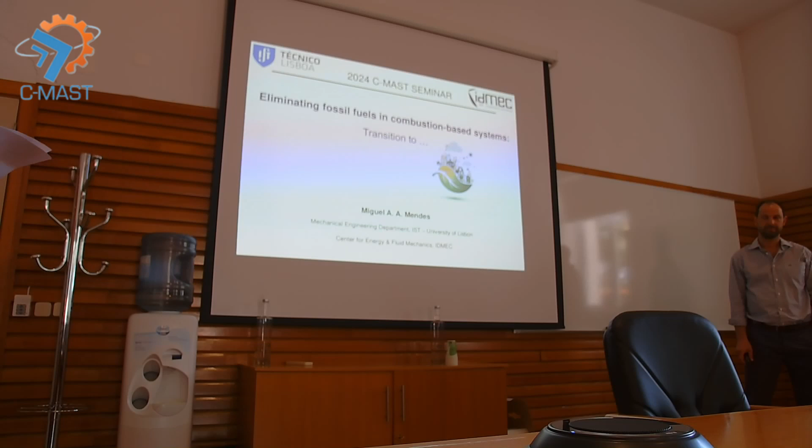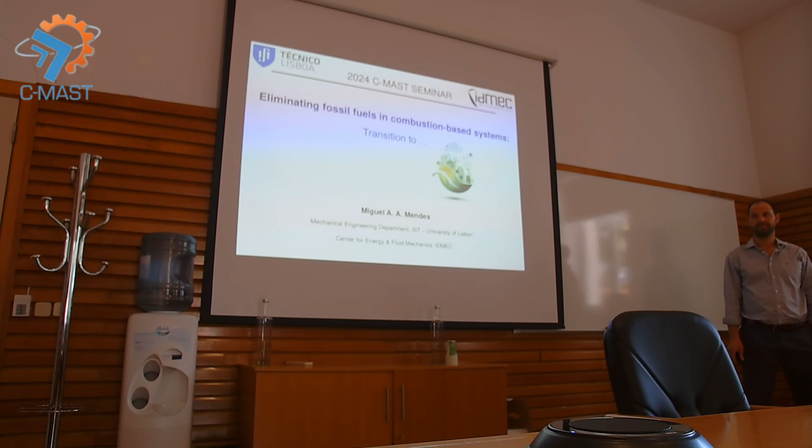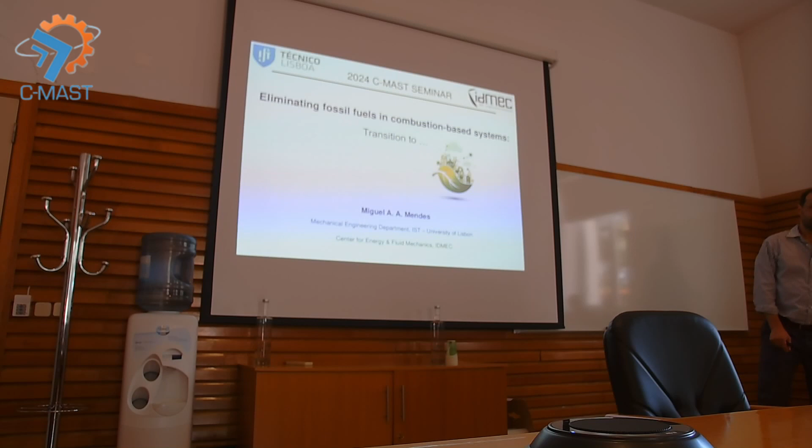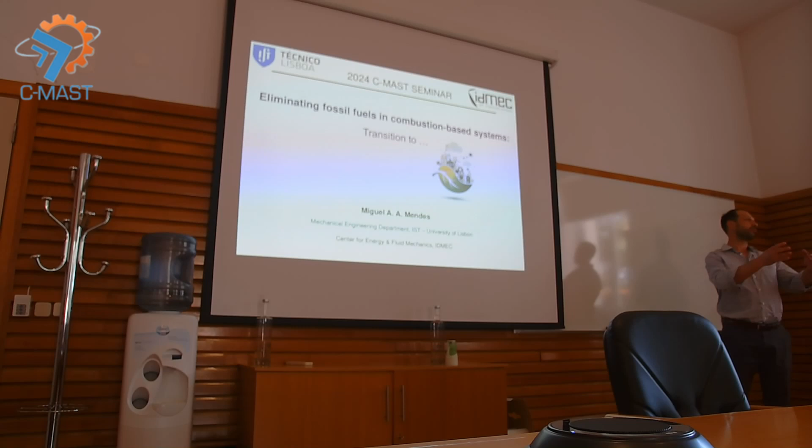Many thanks, and thank you very much for the introduction. Thank you very much for the invitation, and it is a pleasure for me to be here, and I'm jealous that you have the university in such a nice place, with such a nice atmosphere, and I hope that I can bring some useful information to you.

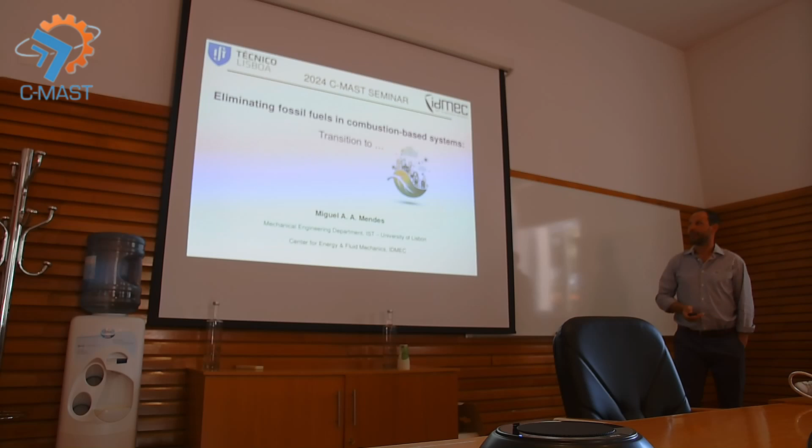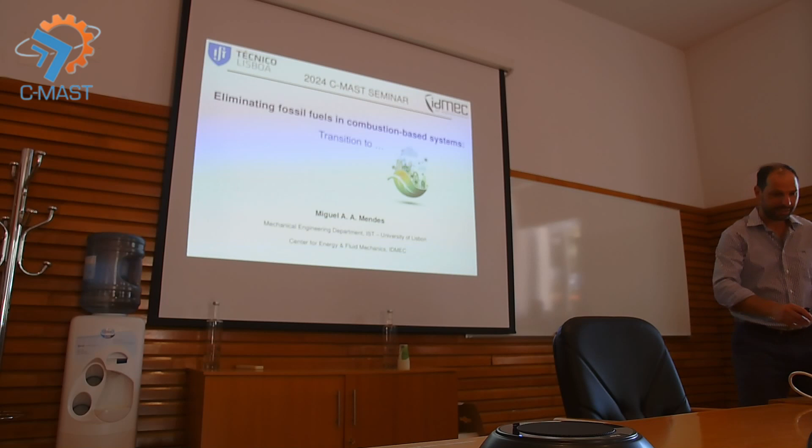So, eliminating fossil fuels in combustion-based systems, the question is: the transition to what? This is the main objective of this presentation, to present the actual situation.

Before that, let me make a short introduction. As was said, I took on the big responsibility of coordinating the Combustion Laboratory of IDMEC IST, which was led by Professor Mário Costa. He created this laboratory and was a person known worldwide in the field of combustion, particularly industrial combustion, not just fundamental studies but applications. At the moment we don't have such a big team.

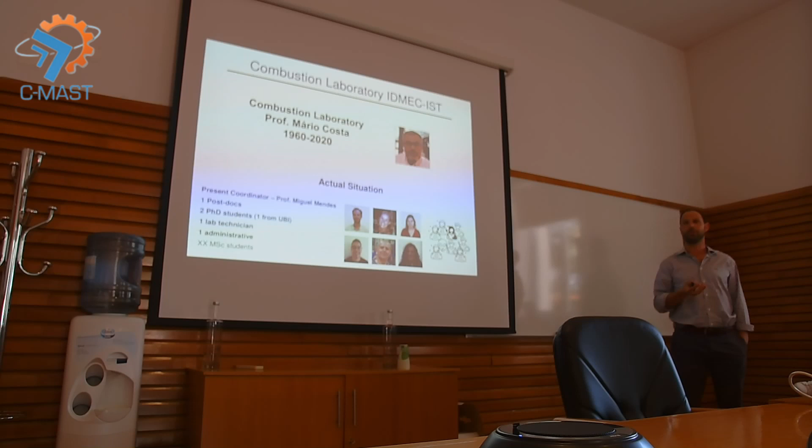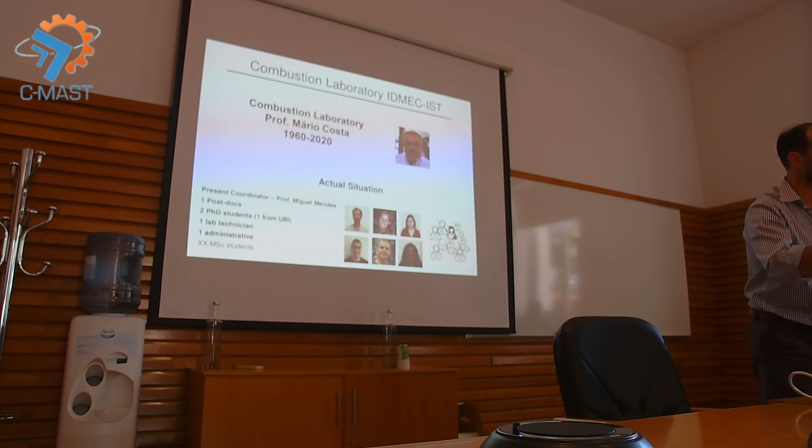I want to highlight that we have one PhD student from UBI who is staying there, although doing the PhD here. We have collaboration with Professor André Silva. This is just to give you the perspective that we have an open laboratory, so if you need to do something or need something, just send us an email, as long as we are able to give support.

So, our research areas: more or less we are focused on biomass thermochemical conversion processes, like carbonization and other processes without oxygen - here we don't really have combustion, it's pyrolysis. Then some research in alternative fuels to conventional fossil fuels, so hydrogen, ammonia, sometimes multi-fuel systems, and particular applications.

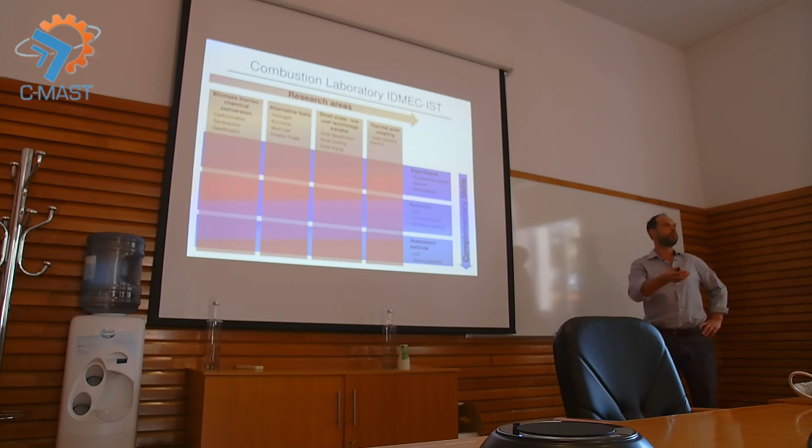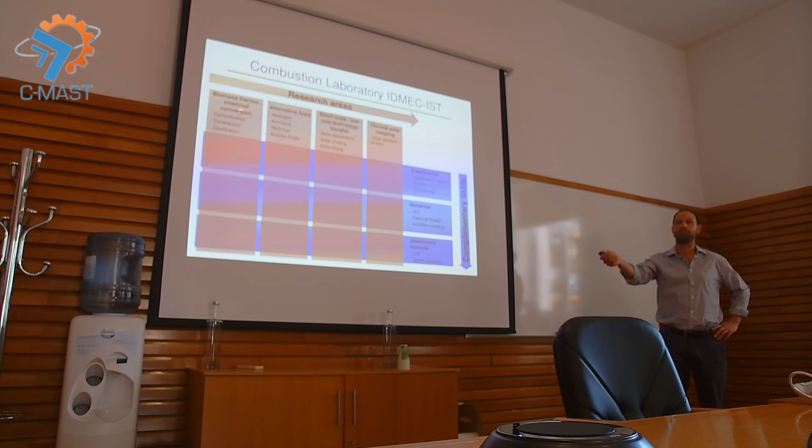This is where we have cooperation with UBI and TAP, on sustainable aviation fuels. And then other side activities, basically trying to relate chemical energy storage in the form of fuel with solar thermal energy - small scale, low cost technology transfer. This is useful, for example, for developing countries. Industry is not very interested in this type of project, but thermal-solar coupling, particularly when you have an endothermic process, may be interesting - solar concentration, high temperature.

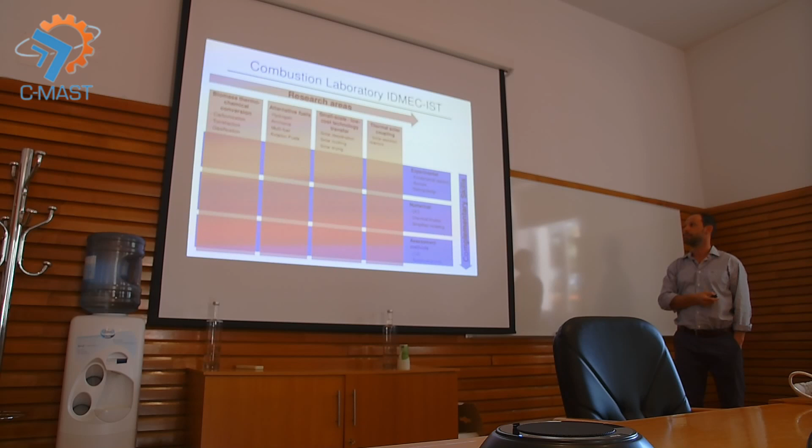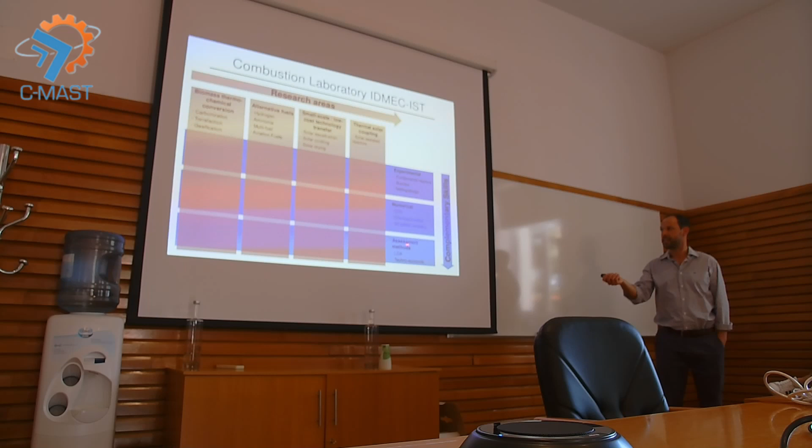And then the skills that we have in our team: from experimental design, testing of reactors, and also some numerics, and also some assessment methods like techno-economic analysis or life cycle analysis.

Okay, let's go directly to the topic: available energy for combustion. The first thing we need to understand with all this transition that we are facing nowadays is that all energy sources are of renewable origin, even fossil fuels. The main problem here is the formation time scale.

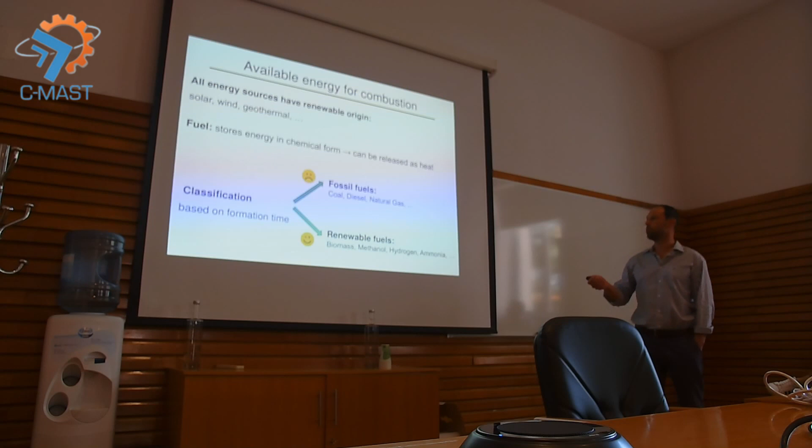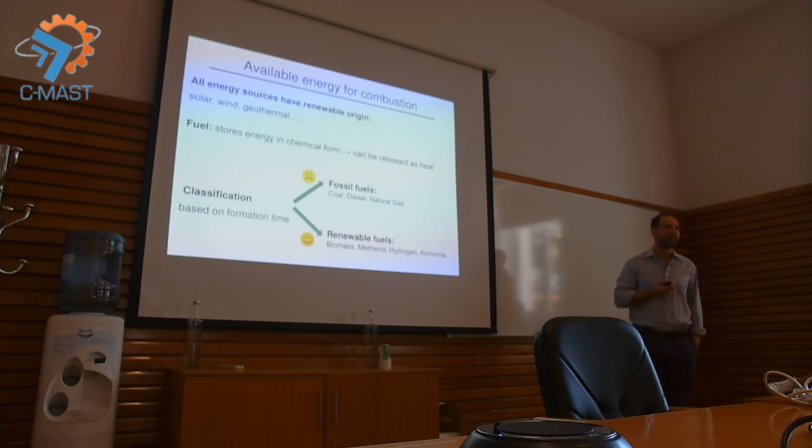What we call a fossil fuel is one where the formation time scale is much larger than the human scale, let's say the scale of utilization. Renewables are now the focus, basically because there are some issues at the moment in terms of sustainability. But keep in mind that in the end, all energy sources are renewable.

At the moment, the main problem, according to the data we are facing, is the CO2 problem. But we are still relying on fossil fuels in a very strong manner. We cannot just turn off the lights and stop the car, so we need to find alternatives.

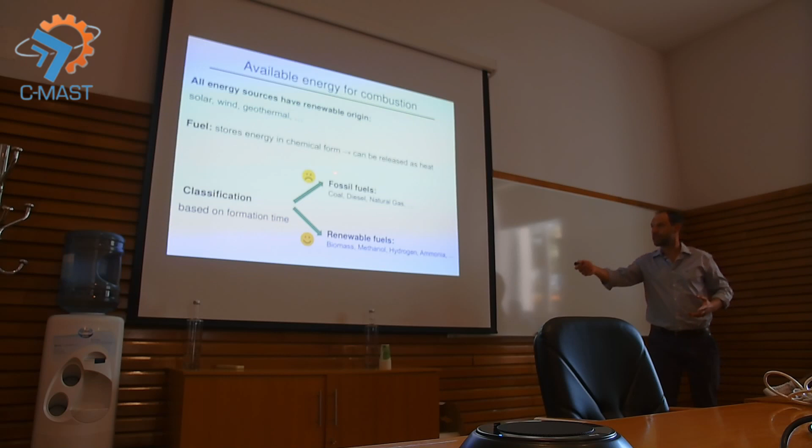The main problem - and this is why I placed here this sad and happy face - it's like you go into a bakery and discover you just find their bread, okay? So these are the cakes, this is the bread, we could say, if you look in terms of energy density. Fossil fuels are very attractive because the energy density is very high.

When you look at hydrogen in terms of volumetric energy density, or at batteries, fossil fuels are winning. So the alternatives that are nowadays being proposed, besides hydrogen, include methanol and ammonia. We are going to explore these issues a bit.

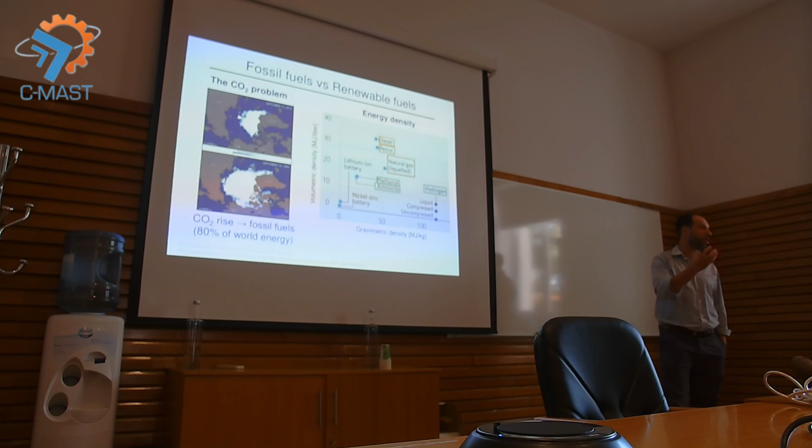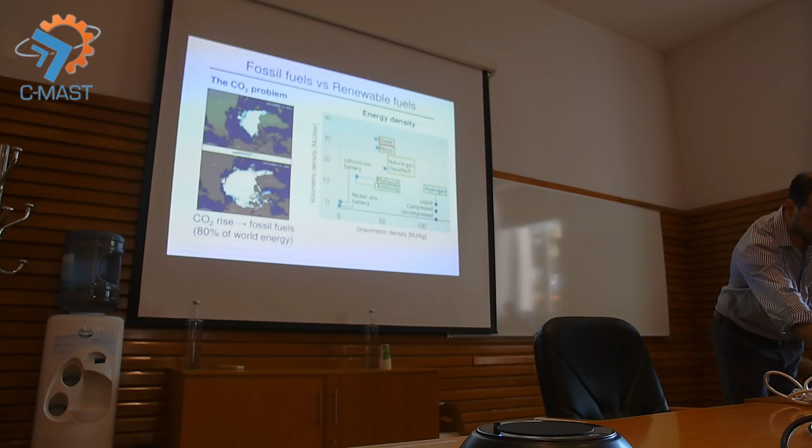But before that, don't forget that we are in transition - 80% of the energy in the world is still based on fossil fuels. So let's look into the CO2 problem.

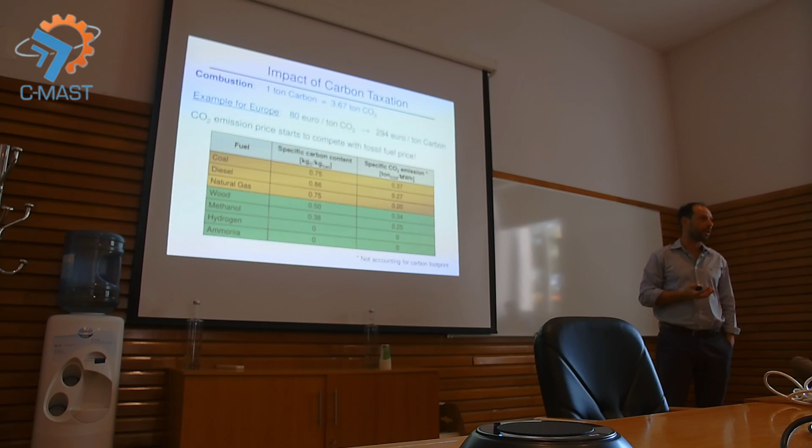When you burn 1 ton of carbon, you emit almost 4 tons of CO2. In Europe nowadays, companies pay 80 euros per ton of CO2, which means almost 300 euros per ton of carbon. So if you have a system running with coal, you pay more for the carbon tax than for the fuel. We need to look into how much carbon you are emitting, and companies are facing a very difficult situation at the moment.

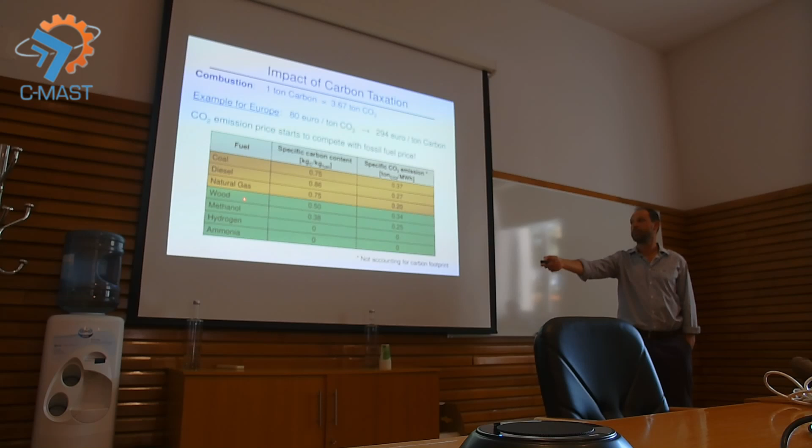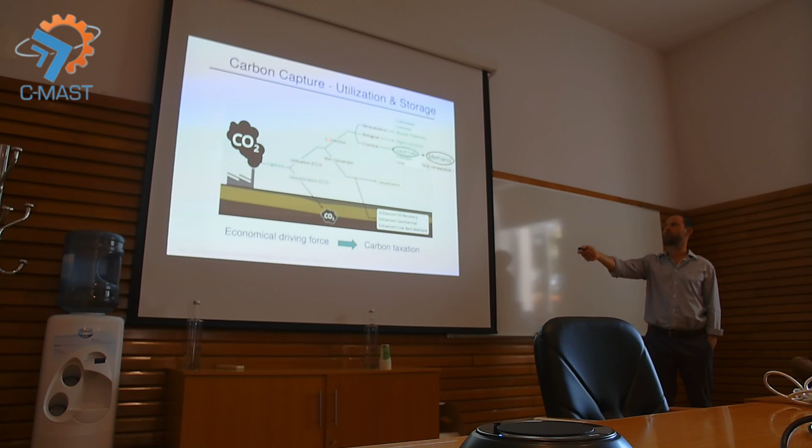Although wood or biomass emits a lot of carbon, it is from sustainable origin. Methanol, hydrogen, and ammonia don't emit carbon, or methanol emits but if it's from sustainable origin there's not a big problem. Be careful with strategies that are very fashionable nowadays, like carbon capture and utilization, where they capture CO2 and use it to produce liquid fuels like methanol. If this methanol is not from renewable origin, it's also not the solution.

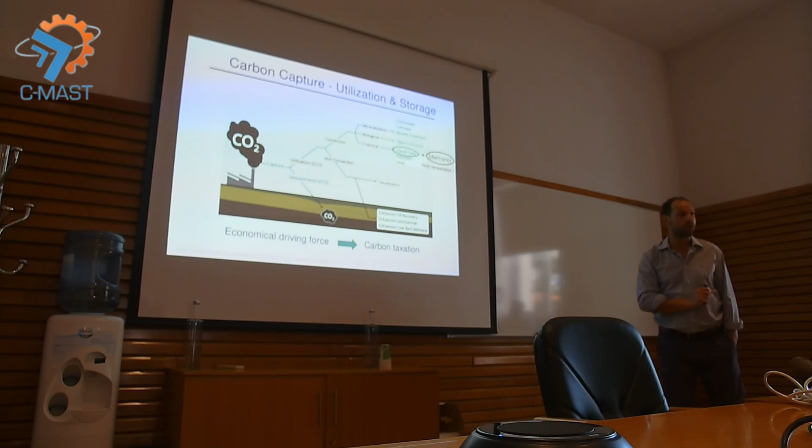So in the end, carbon taxation is the economical driving force for all of this. From the point of view of technology, if we were used to having burners that burn fuel with air, you reach almost 2000 Celsius, without heat losses.

If you have a system for carbon capture, you need to change the strategy. Why? When you burn air with the fuel, you have CO2, water, and nitrogen from the air in the exhaust. The water is very easy to separate from the CO2 - you just decrease the temperature and get condensation of the water. But it's difficult to separate the CO2 from nitrogen.

So what you do is separate the nitrogen before the combustion process, because the air is at ambient temperature, it's much easier. Then you burn the fuel with pure oxygen. What happens? You get very large temperatures. So you either change the material of your system to a high temperature material, or you can recirculate part of the products back to the burner, which will dilute the combustion and decrease the temperature.

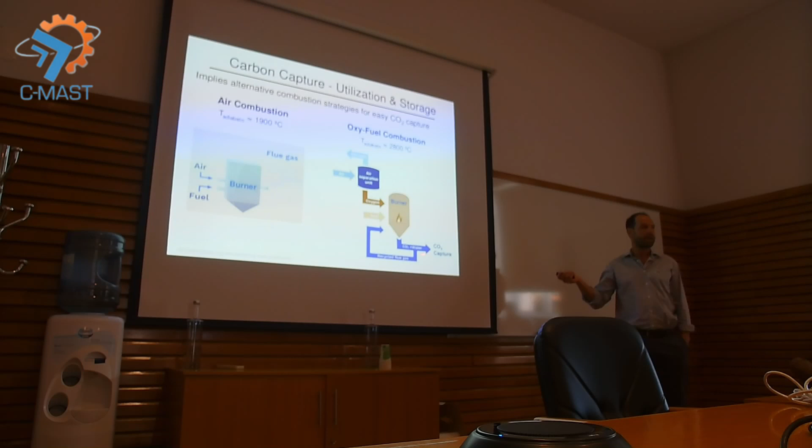But now it's very easy to separate the CO2 because you don't have nitrogen - you just have water and CO2. You decrease the temperature, condensate the water, and get the CO2 for whatever utilization you want. So this is the transition, where the capture of CO2 also plays a role.

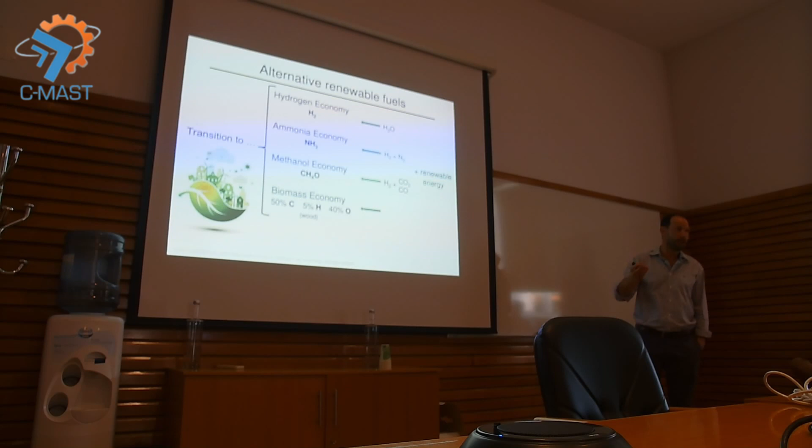But let's look more forward, to alternative renewable fuels. Here is where we start to get confused. Transition to what? You have the hydrogen economy - I think all of you have heard about it. You just need water and renewable electricity to produce the hydrogen. Then there's also the ammonia economy: take the hydrogen you produce with nitrogen from air, which is available everywhere, and with some chemical process, produce ammonia.

Or methanol - you do the same, take the green hydrogen and get some sustainable carbon source, for example from biomass, and produce methanol. Or then just use the biomass directly - you have the biomass economy, which is very curious. That was the first economy we had in the world. Before fossil fuels, everyone was using biomass, it was the main source. The question is why we stopped and now want to return to the origins.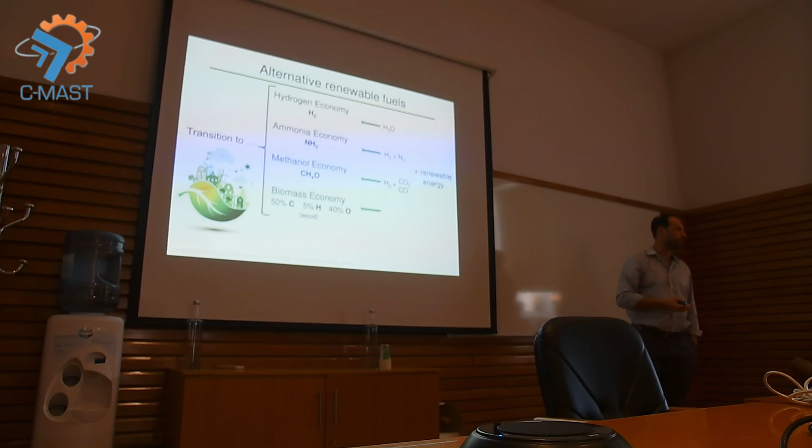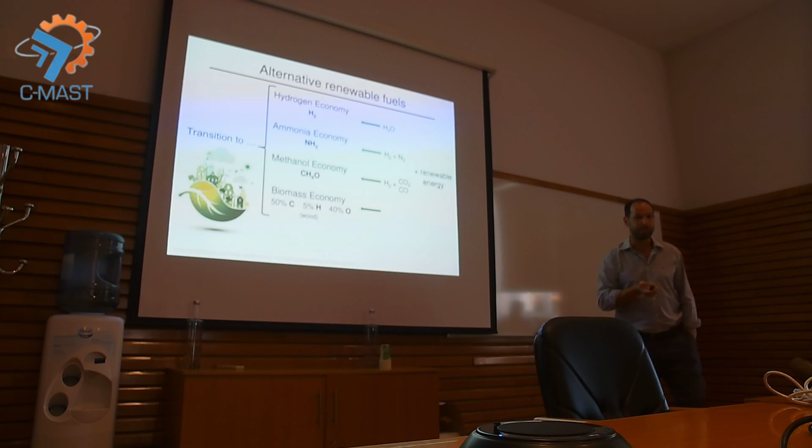The main problem is the energy density, and also you run out of trees if you have this type of economy. That's what happened in England actually, during the Industrial Revolution.

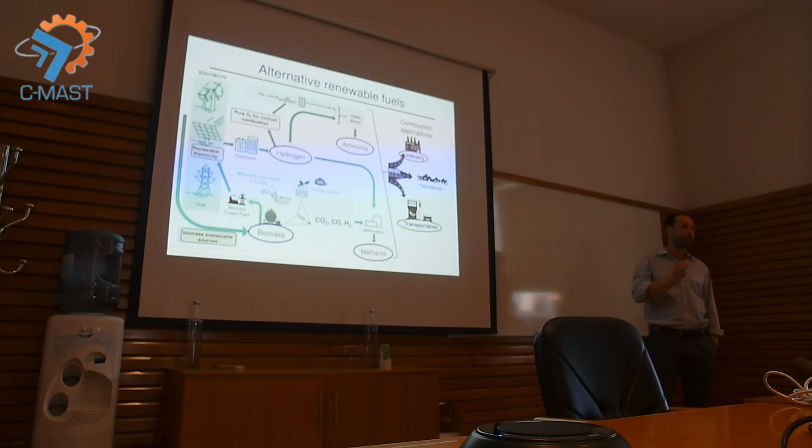So the picture, more or less, is what was in the previous slide: you have renewable electricity, you can produce hydrogen, with air you produce ammonia, or you can produce methanol. For example, if you get carbon from biomass from sustainable sources, you cannot compete with the food chains and so on. And you can still burn part of the biomass and produce renewable electricity. With separation of nitrogen from the air and production of hydrogen, you also produce oxygen. So there is a lot of potential here for research in different fields.

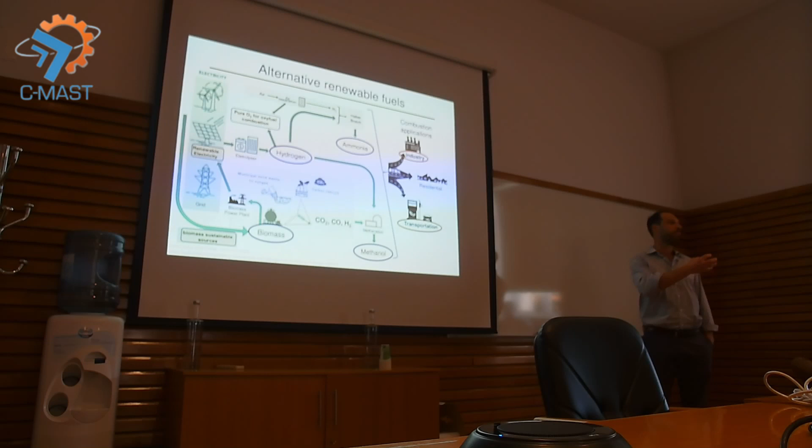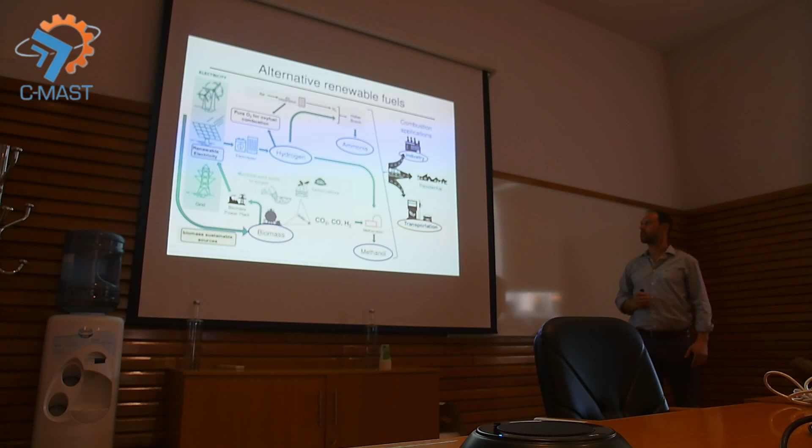And then, this is just the production. Then you have the applications, and here is where we can look into the combustion systems. Depending on the type of fuel that you have, if you use it at large or small scale, or in stationary or non-stationary applications, determines which type of combustion systems can be used. So we need to look into several things: advantages and disadvantages, storage and combustion properties.

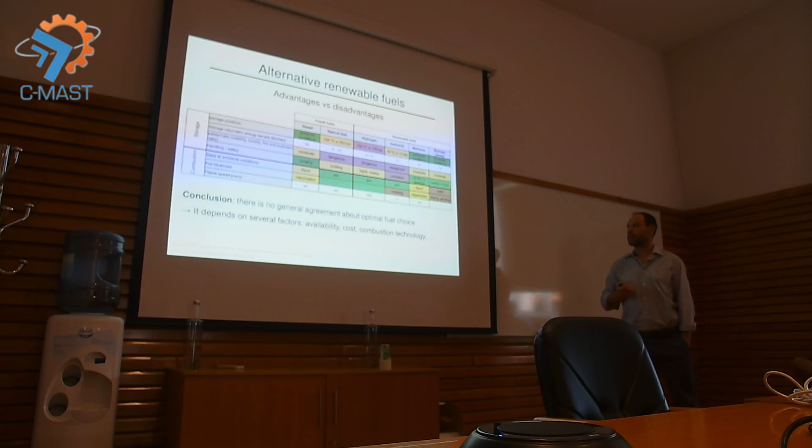From the point of view of storage, hydrogen is the worst. From the point of view of combustion, ammonia is very difficult to burn because it has very low burning velocity. And methanol is not so good either, because it's a liquid - you need to vaporize it. But this is the same problem we have with diesel, and it's not really constrained. So in the end, you need to look at storage and combustion properties and decide - there is not an optimal solution. It really depends on different factors, like cost, availability, and so on.

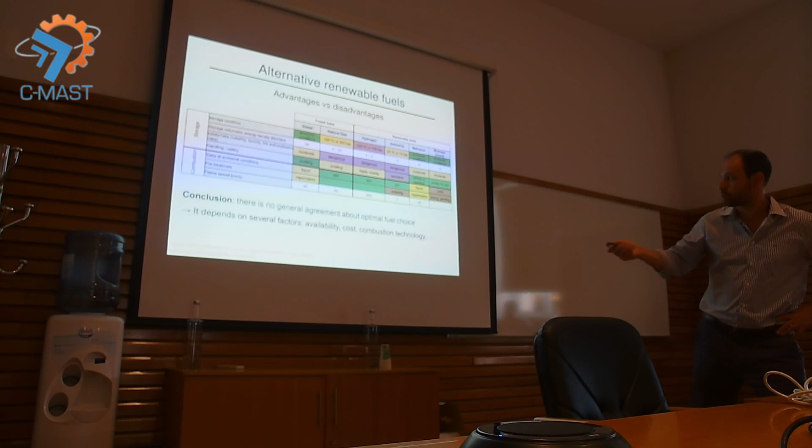So in the end, what is happening at the moment in the world, at least from what we are facing, is what is called the alternative oil field. You dig, and instead of getting oil, you produce renewable fuels with renewable electricity. But in the stream, there is hydrogen, and hydrogen is not very easy to transport because of storage problems.

So I expect local storage and utilization. If you have a factory and you produce photovoltaic energy, you can produce locally the hydrogen and use it directly there - for industries or residential applications. But if you want to take the energy to the other side of the world, you convert it into a more stable form, and it is very nice if your transportation system burns its own cargo - it takes the fuel and can use it.

So here there are two main perspectives for the maritime sector: the ships that carry ammonia and the ones that carry methanol. Methanol is compatible with actual internal combustion engines, and it has just one problem compared with ammonia - ammonia, you get hydrogen and take nitrogen from the air, but to produce methanol, you need carbon, and we don't have carbon everywhere available. So this is the main constraint for methanol.

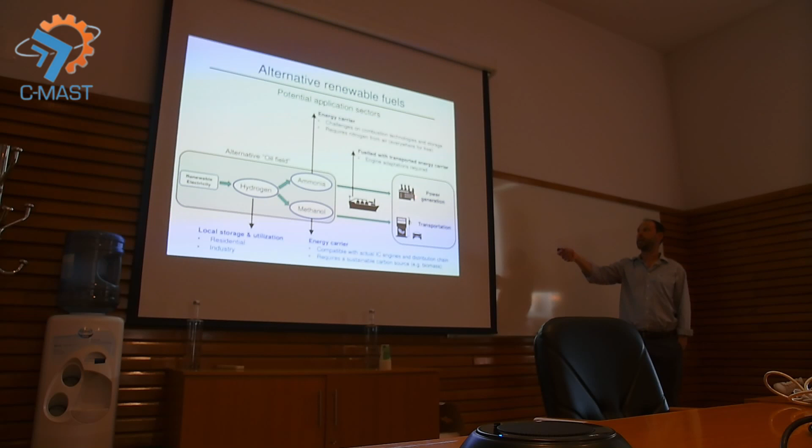For ammonia, it's mainly the combustion technologies and storage - it's not so easy as methanol. Then we can look at different sectors, and it seems that methanol has more potential for transportation systems, like cars with internal combustion engines, and ammonia for large power generation systems that work under steady conditions, where although ammonia is difficult to burn, you can operate at optimal points.

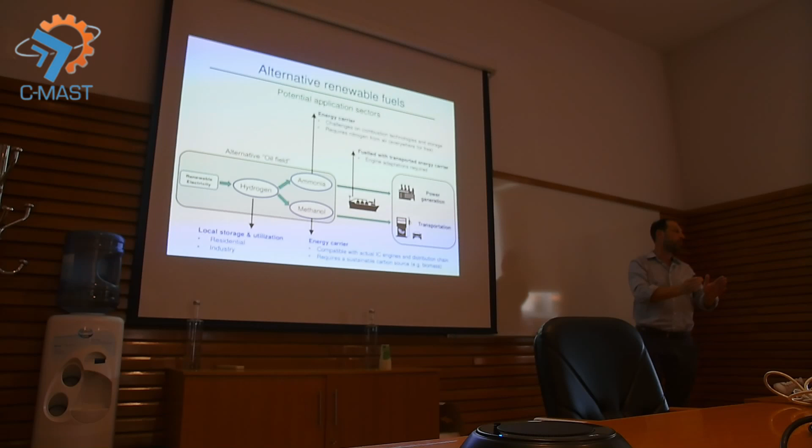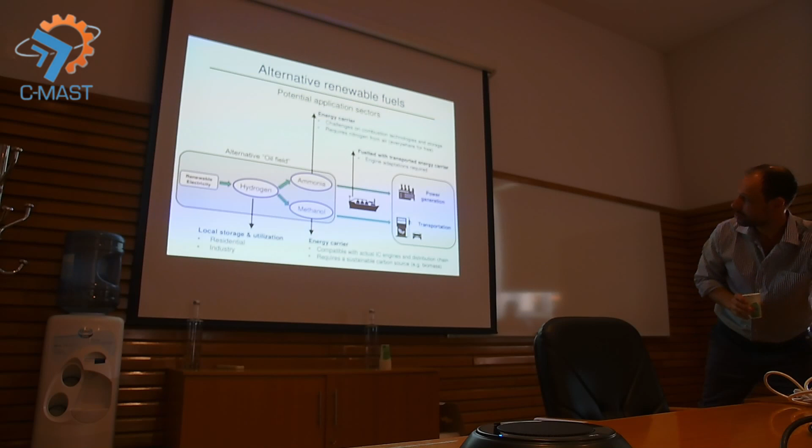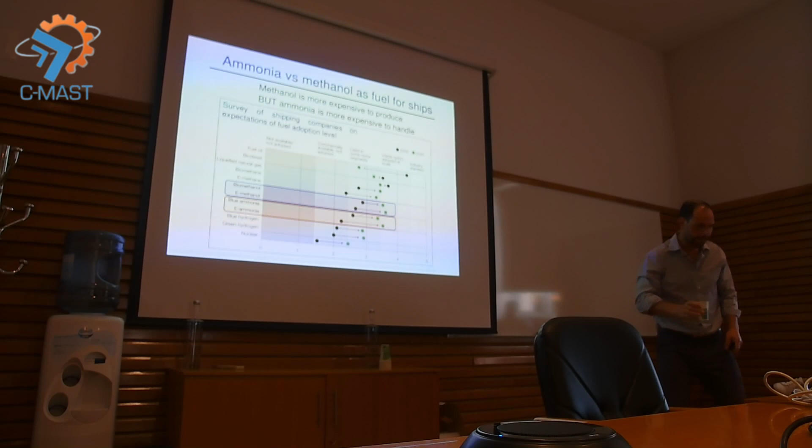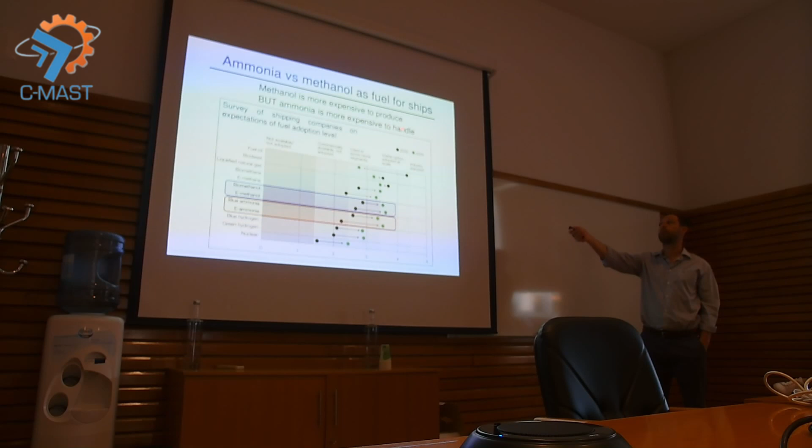From the point of view of the ship industry, these two options of ammonia or methanol - this is a survey done in the maritime sector and the perspectives. As you can see, shipping companies are really looking into these two options, so there is not an optimal solution. Methanol is more expensive to produce, ammonia is more expensive to handle, so you need to find where you have the compromise.

For internal combustion engines, methanol, although you can operate the engine, has several challenges. It has low volatility because it has a high latent heat of vaporization. It has a high octane number or low cetane number, meaning a large ignition delay time. And the heating value is less than half of diesel or gasoline, meaning your car should carry double the fuel to carry the same amount of energy. But there are strategies for modifying the engine.

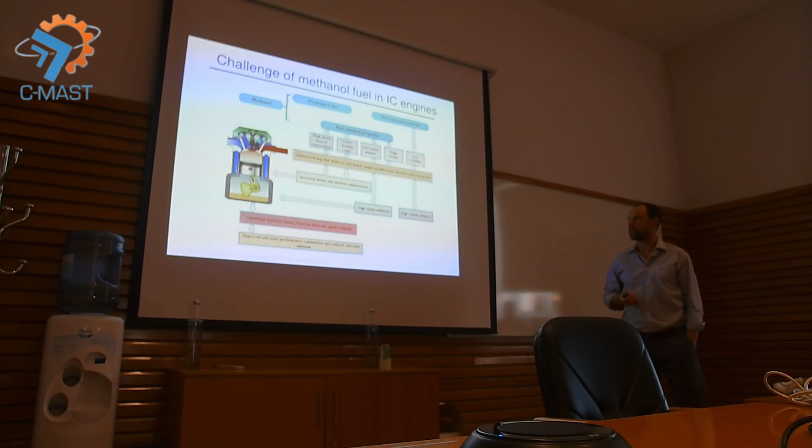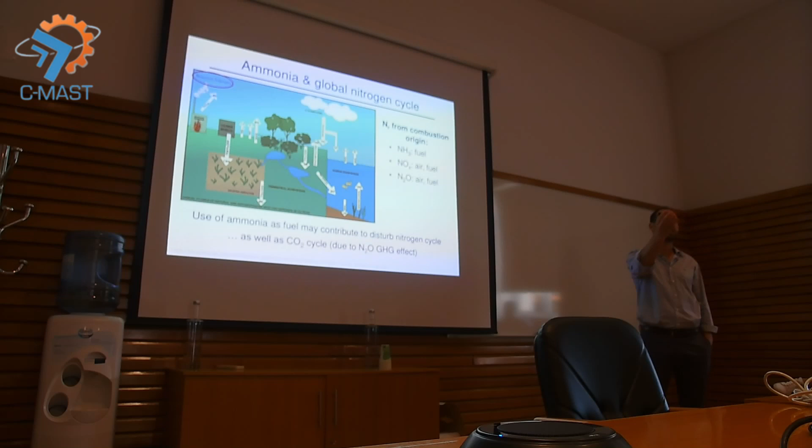So for methanol this is not a very critical challenge, but for ammonia the problem is bigger than what we think. Because everyone heard about the CO2 cycle, the carbon cycle, but nowadays people are doing research on the nitrogen cycle, particularly in Netherlands and Germany, because of agriculture - they use a lot of fertilizers, and this is contaminating the soil and creating an imbalance in the nitrogen cycle.

From the point of view of a fuel, when you look into ammonia, you can produce what is named reactive nitrogen: ammonia, NOx, and this one that is very critical, N2O. Why? Because N2O has a greenhouse effect that is almost 270 times the effect of CO2. So even if you emit small amounts, you multiply this by 270, and then you decide what is better - to emit CO2 or to emit N2O.

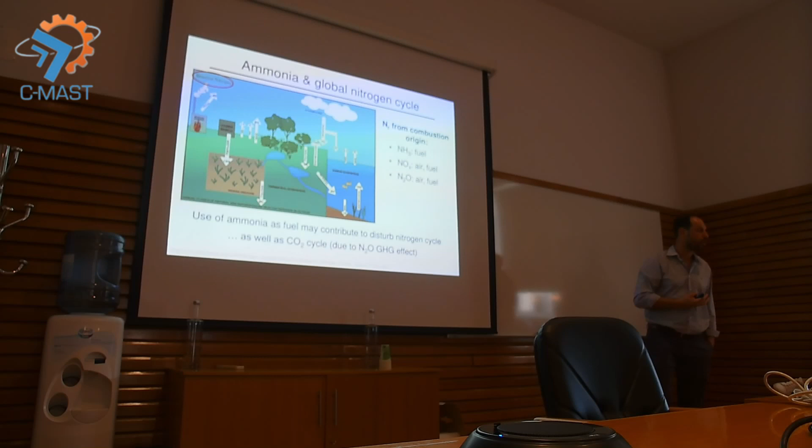N2O is a pollutant whose production depends on the efficiency of your combustion system. Besides NOx, which is typically something we look at when we develop a combustion system, nowadays using ammonia, we also need to look into the N2O.

If you want to develop alternative combustion technologies, I identify two challenges here. First, in the short term, is the capacity for smooth transition from fossil fuels to alternative fuels. What does this mean? It means your burner should be fuel flexible, able to burn different fuels. And once you move your combustion system to work with alternative fuels, you face challenges in emissions. So these are basically the two things we can look at.

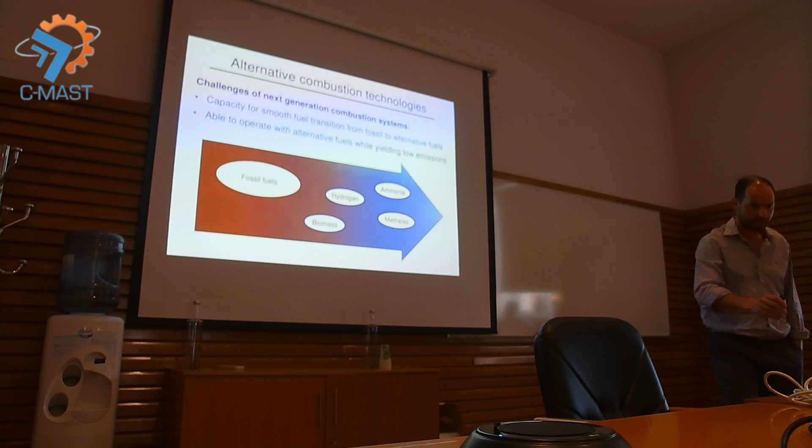Now I'll show you some results from our combustion laboratory. We developed burners to try to achieve fuel flexibility, burning natural gas, ammonia, and hydrogen.

For example, this is a porous medium, a ceramic foam that you can use to develop radiative burners. This is a multidisciplinary topic that may interest people doing research in materials, as well as those studying flame stabilization and functionality.

If you look here, you have a flame with 50% in volume natural gas and hydrogen. When you look at a 100% hydrogen flame, it's almost transparent. What does that mean? It doesn't radiate much, so the radiation efficiency is low. If you have a combustion system, say in an industrial furnace, where you're transferring heat by radiation, this is a problem.

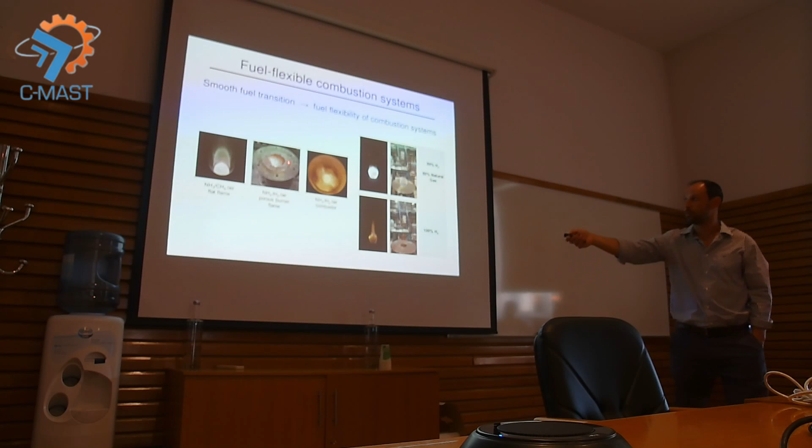You can always try to look into radiative burners. But anyway, the recipe to develop a fuel flexible burner is to look at different strategies to control mixing, temperature, and of course flame stability, which in the end depends on mixing and temperature.

There are different strategies used nowadays: air fuel staging, exhaust gas recirculation, as I told you before, and aerodynamic effects with swirls—double swirl, low swirl, bluff body. In the end, it's about control of temperature. You want efficient combustion and optimized heat transfer.

Pollutant emission is always important—you need to obey the regulations. And flame stability means your burner can work across a wide range of power.

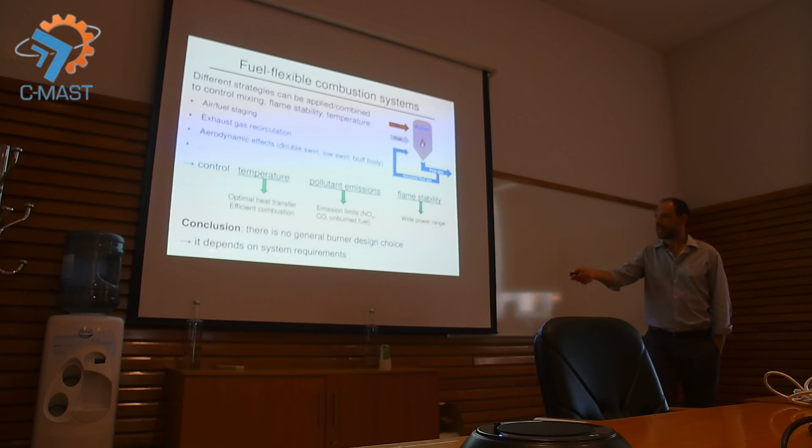I always ask the students in the combustion course why your cooker at home has 4 burners. Do you cook 4 things at the same time? No—you have 4 burners because you cannot have one burner that covers the complete power range. Of course, maybe 2 to make soup and rice, but the power range is sometimes what limits the system. So everything depends on system requirements—there isn't a general solution.

Let's look at some examples to get the idea. This is the Toyota hydrogen burner concept, introduced by Toyota around 2017 or 2018. They have a typical burner where you mix the fuel with oxygen, and they were getting large emissions. So what they did was create a system where the oxygen is injected at a larger distance from the fuel, creating an aerodynamic effect—a recirculation zone that somehow avoids a peak of temperature.

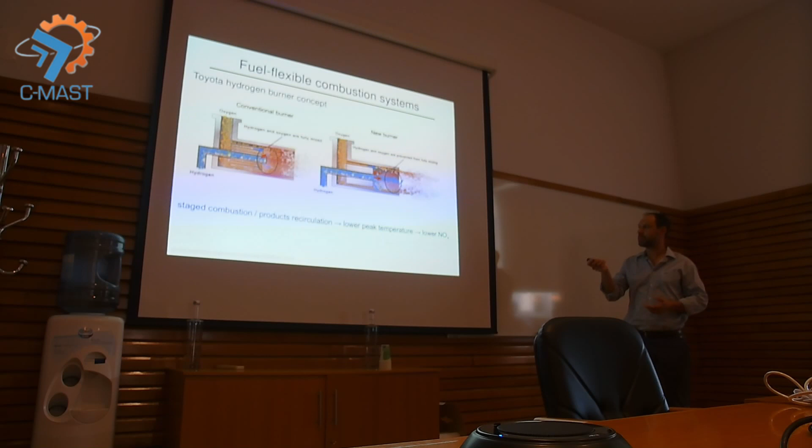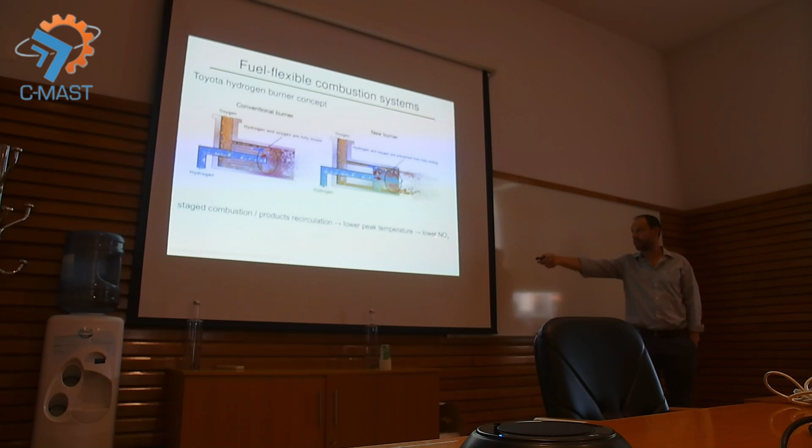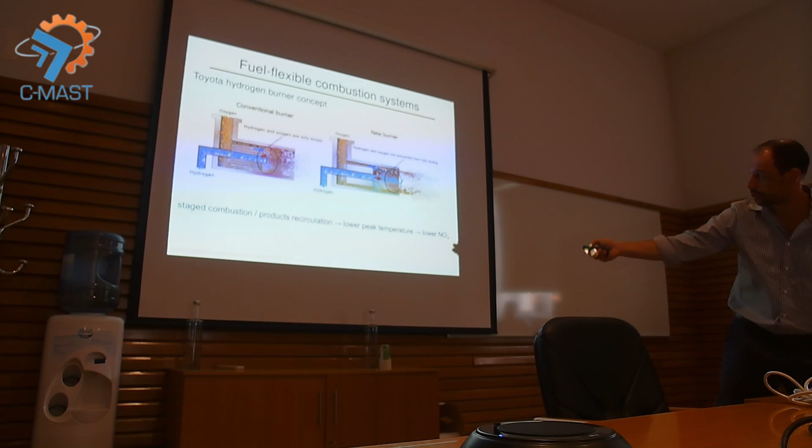This means they could decrease nitrogen oxide emissions, because NOx typically comes from the nitrogen in the air, but forms due to high temperatures—you get decomposition of the nitrogen and formation of NOx. This was just to show you that aerodynamic effects can sometimes have a big impact.

The main problem with this burner is flame stability. If you try to make a multi-fuel burner with this concept and start introducing hydrogen mixed with natural gas, you need to change the geometry of your burner. Some systems have a variable blade angle, but that's also a question of price to produce a system like this.

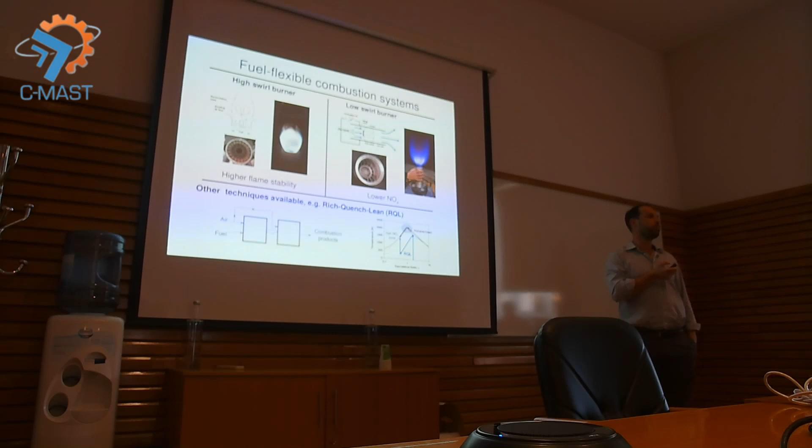This is good, for example, to burn natural gas with hydrogen, and it can also burn ammonia. But then the problem is, as I told you, the emissions. So with ammonia, we need to get more careful with emissions.

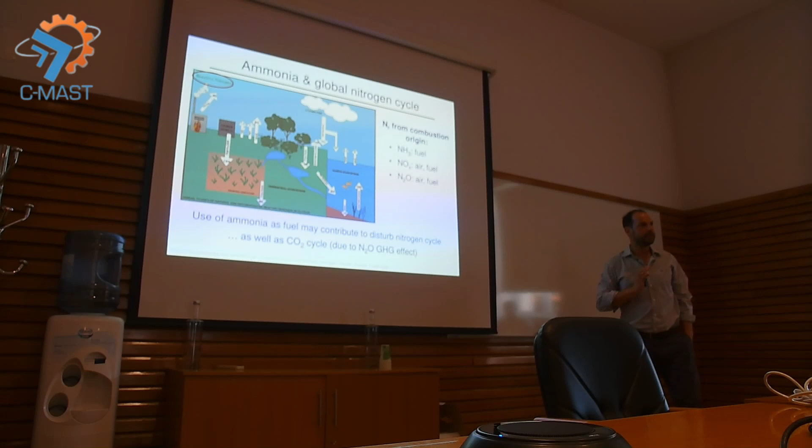Why? When you have combustion of ammonia, you are introducing nitrogen from the fuel. So you produce a lot of NOx, more than if you burn with natural gas or hydrogen, for example. And this is really a critical issue besides the N2O. So here, the flame stability is not the only issue.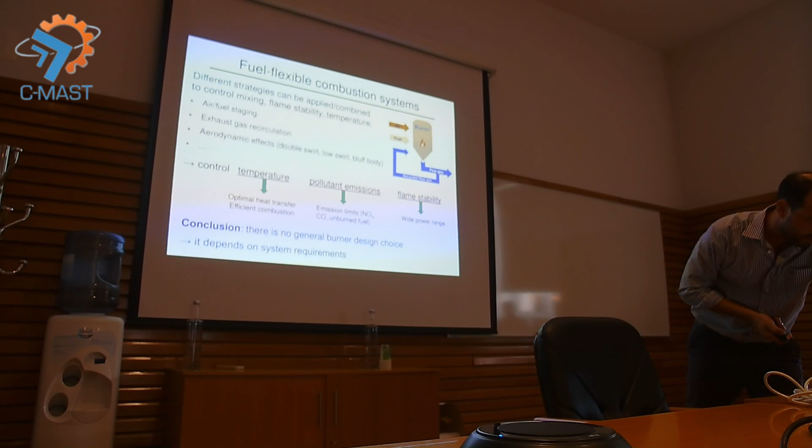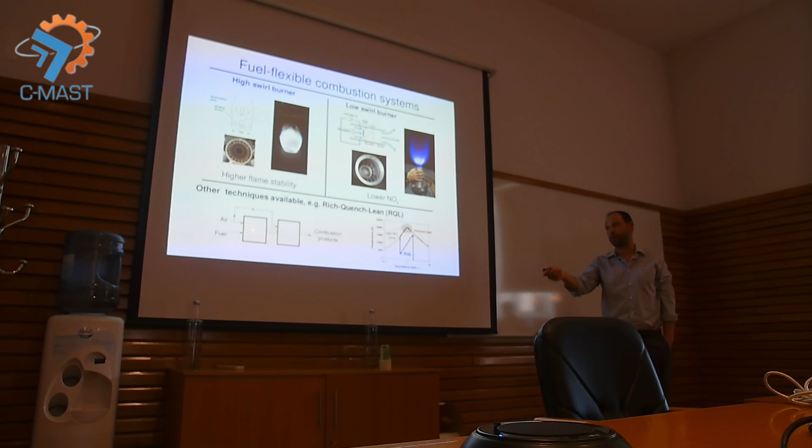So what we are looking for now is to develop a burner using the concept of staged combustion. As I told you, air-fuel staging, you can use this technique to control the combustion process. So what we do, we burn rich, meaning with excess of fuel. We don't provide enough oxygen, so this works a bit as cracking, you break the fuel molecule, burning a bit, and then you inject more air and you have a lean combustion, burning with excess of oxygen.

So what happens, I don't know if you all know, if you mix a fuel and the oxidizer, for example air, depending on the proportion, if you burn stoichiometric, meaning you give the exact amount of air to burn the fuel and complete the combustion process, you get more or less the maximum temperature. If you burn with excess of fuel, the temperature decreases. If you burn with excess of air, the temperature decreases.

So this type of concept, what it does is, the typical burners, like this one, operate with non-premixing. So you mix the fuel and the oxidizer at the moment when you have the combustion. So you get high temperatures, you get large emissions of NOx.

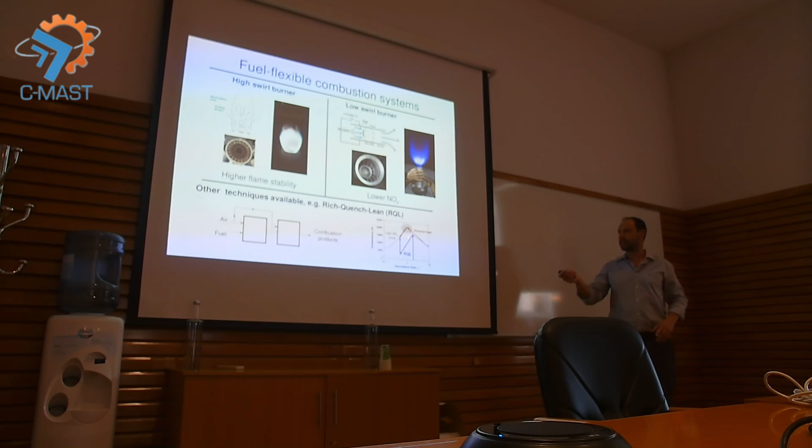With this type of strategy, you burn rich and immediately you burn lean, so it's named rich-quench-lean. You burn rich, then you inject the secondary air very fast, so fast that you don't give time for combustion, and then the combustion is completed afterwards at lower temperatures.

So we are developing a system like this where you have two stages. You have the first stage of the burner, rich combustion. Here is the burner, a typical burner. You need to find a stabilization strategy for the flame. This is burning ammonia with hydrogen. You cannot really see the flame here because it's covered with insulation, and then we put just here a flame on the top. Why? Because we don't have the second stage yet. We are still developing the second stage.

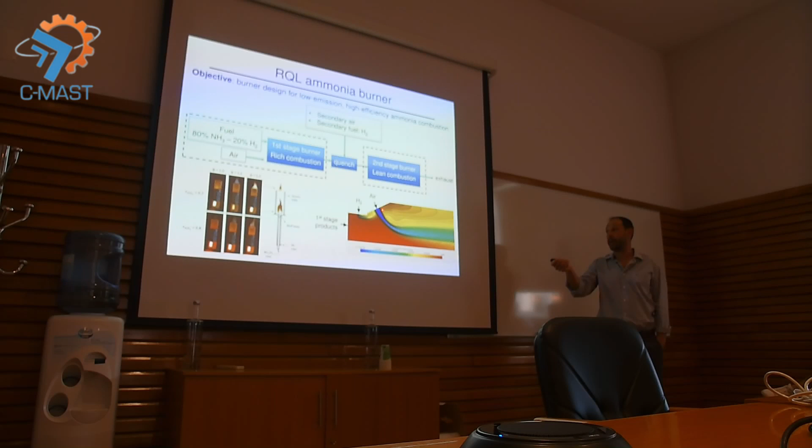But you can already see that this type of flame you see here is very rich, let's say a hydrogen flame. Not 100% hydrogen, but very rich in hydrogen. You can even inject more hydrogen, for example. Here, the mixing strategy is that the combustion products coming from the first stage are mixed with hydrogen and air, or just air, and these aerodynamic effects must be optimized to get efficient burning.

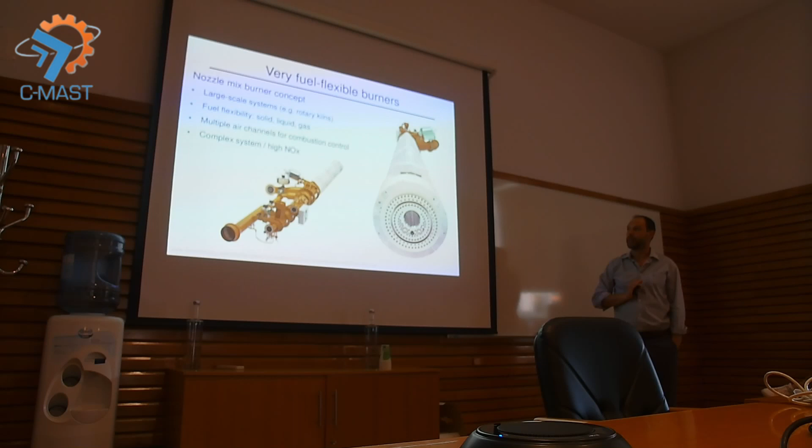So in this figure, I just want to show you the very fuel-flexible burner. This is the Ferrari of the burners, and they are used in very large systems. For example, in Secil or in Cimpor, the cement producers, they have this type of burner. They burn everything—solid, liquid, gas. The problem is they typically burn everything at the same time.

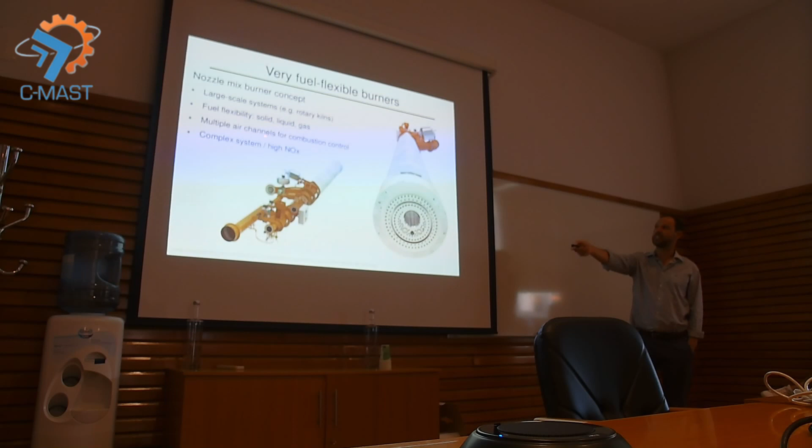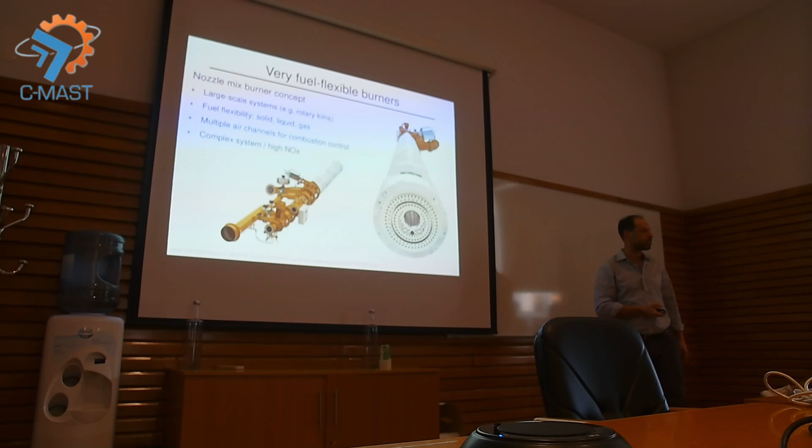If you try to put this burner working only with hydrogen or only with ammonia, it is very difficult to get efficient operation. But if you want to mix everything—coal, biomass, diesel, hydrogen, whatever—they work very well, and they have a very complicated system of air channels. Depending on the fuel mixture, you change the system operation to control the emissions. And even though the emissions are high, this is such a large system that you can pay for a post exhaust gas after-treatment.

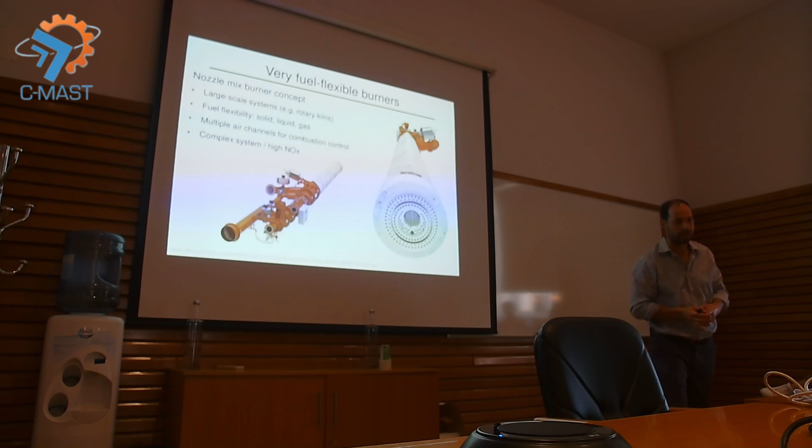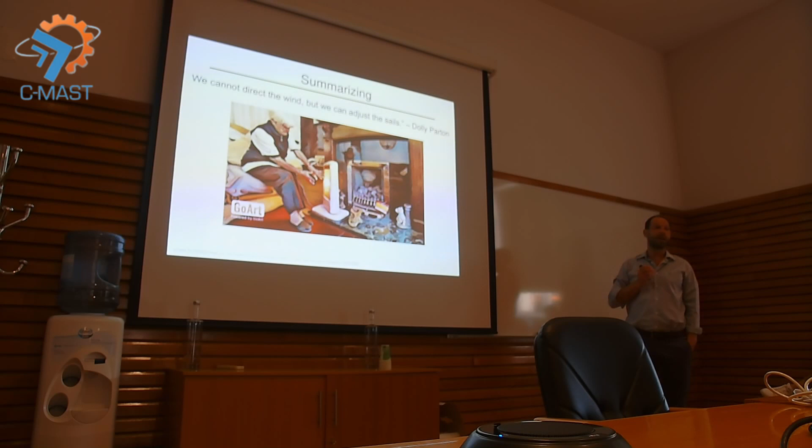So the last message is here. In the end, there is not really a single solution. So the transition is, let's say, we'll have several options. Thank you very much for your attention.